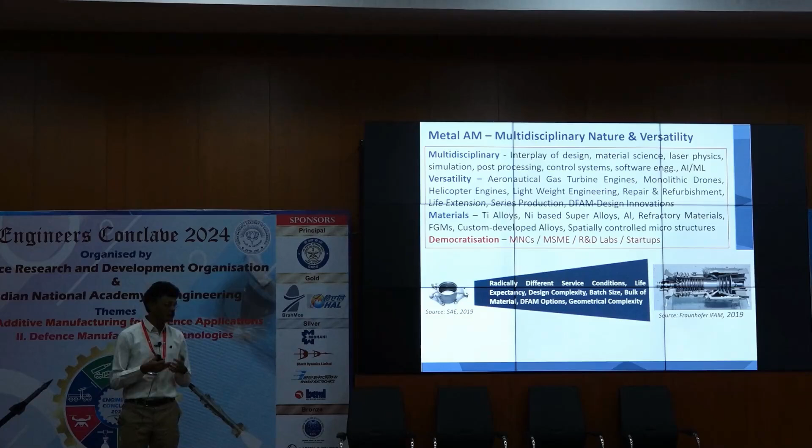Now the context which I would like to describe is connected with aerospace and defense primarily. And if you were to look at the application journey of NASA, just as a reference, the recent applications talk about bimetals. And as has been brought out by the preceding speakers, large format printing is also one of the most important things with which this evolution can easily be characterized.

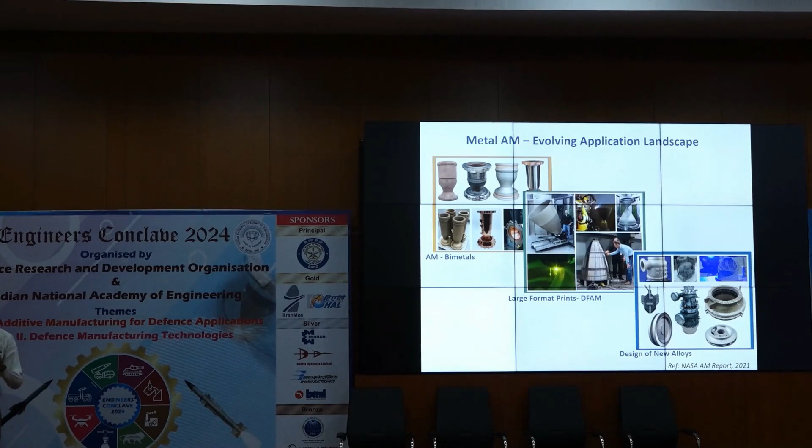And the reason why there is an explosive interest in the applications connected with additive manufacturing is because of the material choices. The kind of applications and their criticality can be easily inferred by looking at one of the early frameworks.

If you were to see here, initially the parts that used to be made were mostly confined to those contexts where parts were in the secondary load path. There is no criticality of the machine, the structural margin is absolutely very large, and you will not have any problem in case the part fails prematurely.

But if you look at the recent examples, we are talking about using mission mode parts with low margins, especially for critical applications with the A1 kind of class with reference to 3D printing related applications. And concomitant to that phenomenon is also the effort which is required with reference to qualification.

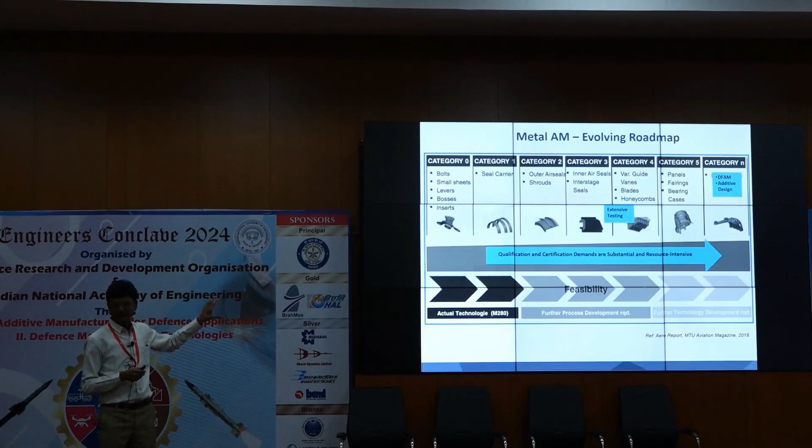Mr. Prasad is more qualified than anyone to talk about it, but if I have to capture it in just about a minute: the companies or enterprises which are into the development of the systems start up with category 0 components, which are not very critical with reference to the load path, and slowly and steadily they gain confidence in the behavior.

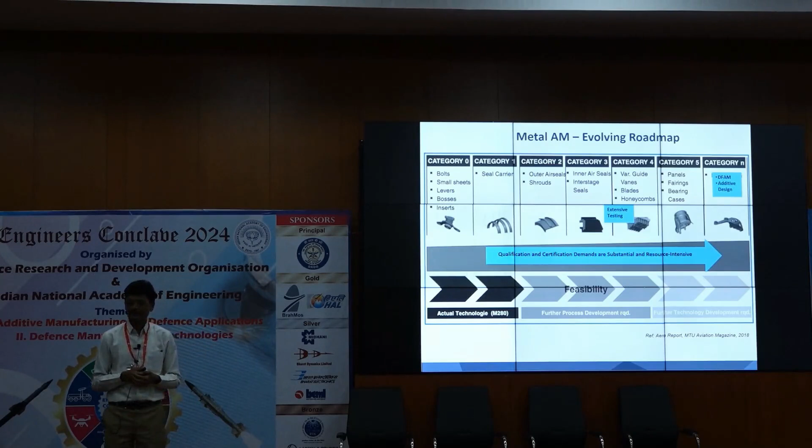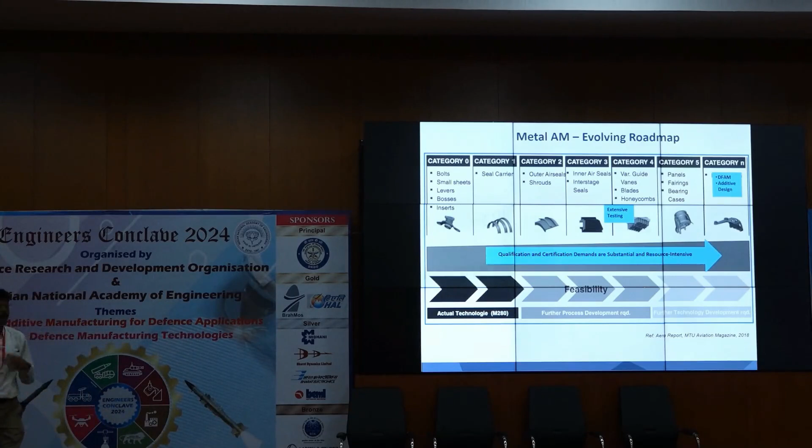In the designs, and we start looking at higher categories where we are talking about parts like variable guide vanes and turbine blades, etc. Equally, the interesting thing is category N, where you have an opportunity to revisit and repurpose the design and try to fulfill the functionality in a much superior manner.

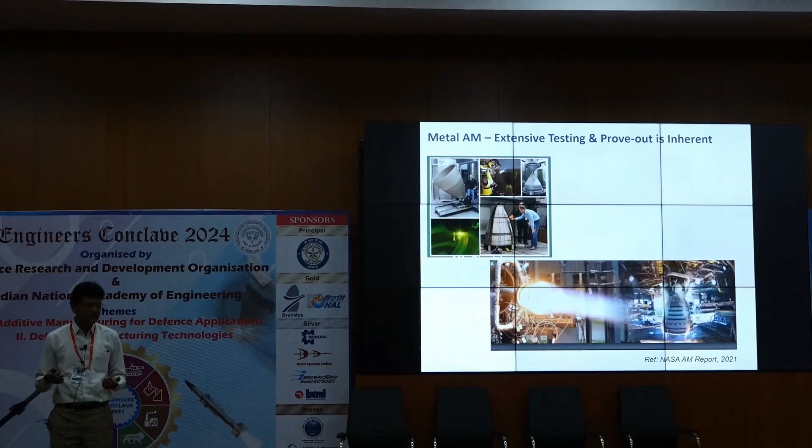Whenever we are talking about designing for additive manufacturing or repurposing the design, you can definitely see that the effort involved in manufacturing or realizing the physical artifact could be X, but the effort involved in proving out and certification could be 10x. So the effort for testing and proving out is one of the very important things when we are looking at the possibility of applications.

I'll just pick up an example. It's not a dynamic component. In fact, this is one of the very famous case studies from Bell Boeing Osprey. It is a military aircraft with VTOL and STOL capabilities.

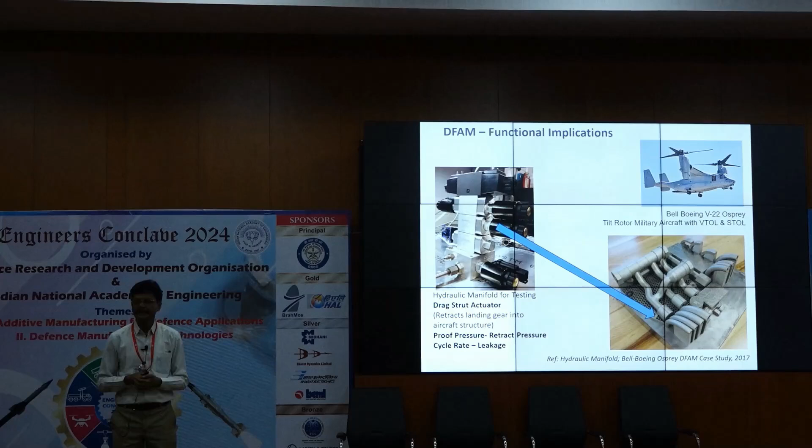And incidentally, the part which is shown is a hydraulic manifold, meant for retracting the landing gear into the aircraft structure. And the part shown there is required for checking the structural integrity evaluation of this drag strut actuator, and we are talking about proof pressure, retract pressure, cycle rate, leakage, etc. You can see the paradigm shift in the way the design looks.

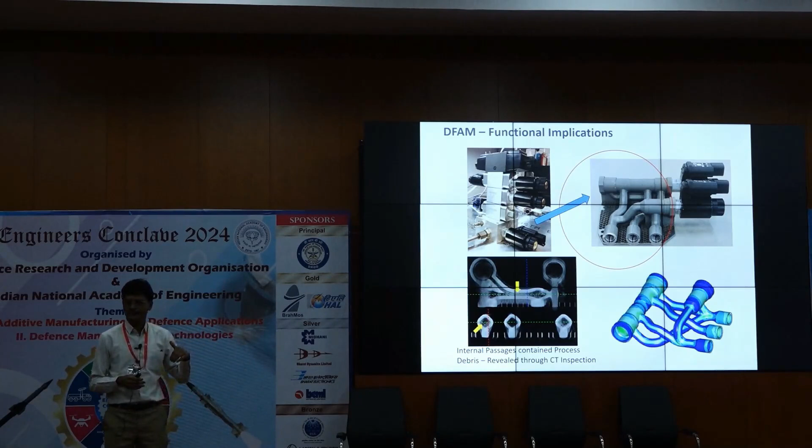The challenges connected with the DFAM could come and spring a surprise at any stage. Dr. John also talked about the standards, but what is very remarkable is the diversity of standards. We have a category of standards connected with general vocabulary, process-specific standards, material-specific standards, and also application-specific standards.

I don't know how many of you are aware, for offshore applications and naval applications, the DRDL has been working very closely with multiple naval agencies in India to come out with the certification portfolio for impellers. And there are a plethora of choices.

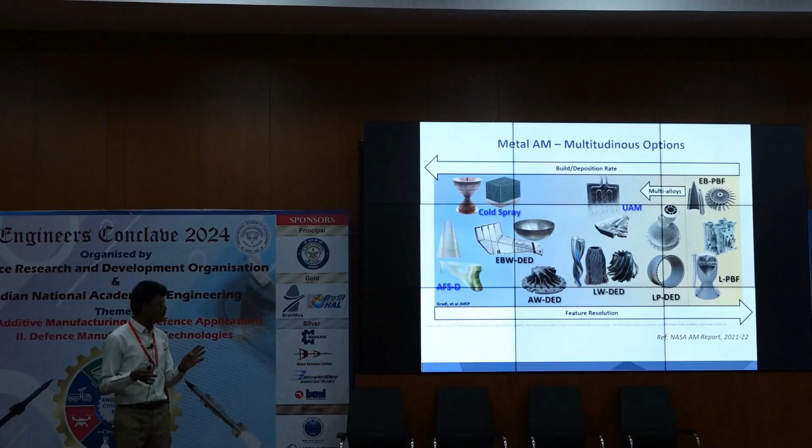If you are talking about metal AM, I would like to pick up just two features on the X and Y axis that decide our judgment. One is the resolution and the other is the build rate. If you were to talk about high volume or high deposition rates, definitely you will have proclivity towards the DED techniques where you can make large parts in limited time.

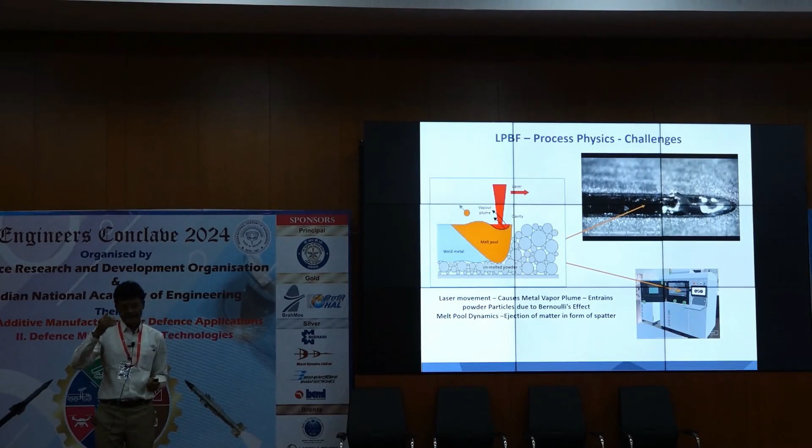But if you are talking about high resolution parts, we need to think about technologies like laser powder bed fusion. Central to this particular process is the interaction between the energy source and the metal powder, and continuously there is melting and solidification happening under the influence of high thermal gradients.

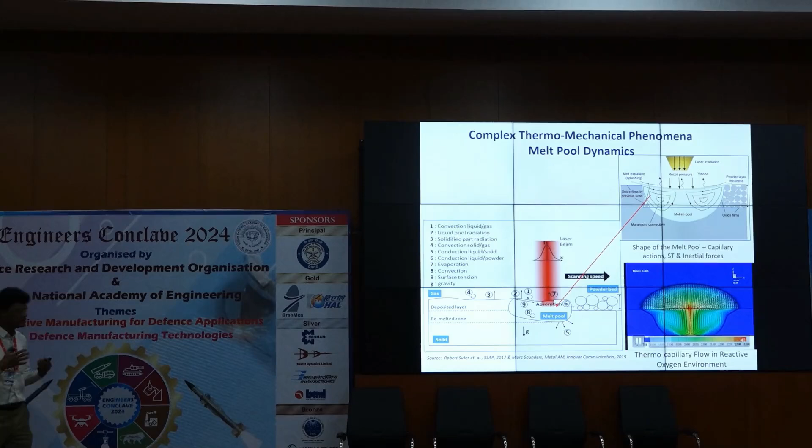Though the energy across the width of the beam varies marginally, that leads to differences in the surface tension, and these surface tension related differences cause turbulence in the melt pool. The melt pool size is not only influenced by the capillary forces, it is influenced by the surface tension gradients and also inertia forces.

Interestingly, gravity doesn't impact it. That's the reason why you might have seen many case studies where people are talking about additive manufacturing in microgravity. So contrary to what we think, gravity doesn't impact it.

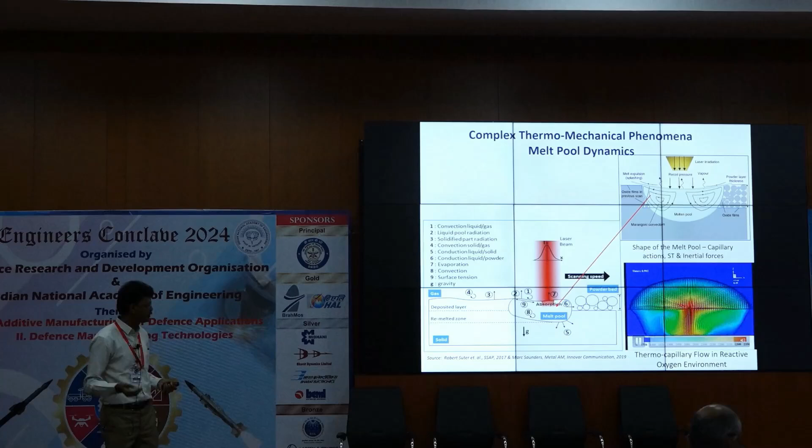If you were to look at the heat transfer modes at the center, we can see there is conduction and reflection, there is radiative heat transfer from the melt pool to the environment, and we are also talking about continuous churning and turbulence within the melt pool, which is leading to convective heat transfer.

So how do you actually approach this particular process while you do not know anything about the behavior of a material in the context of additive manufacturing? We start plotting these P-V diagrams, laser power on one axis and scan speed on the other. By various permutations and combinations, you can demarcate 3 different zones wherein if you apply less energy, you may lead to lack of fusion.

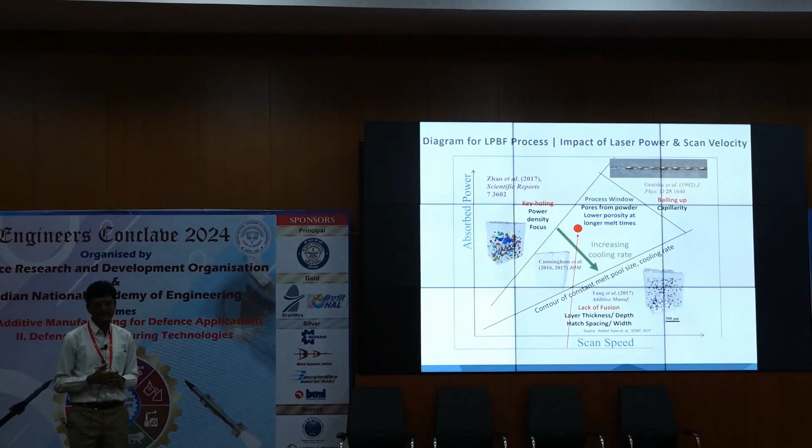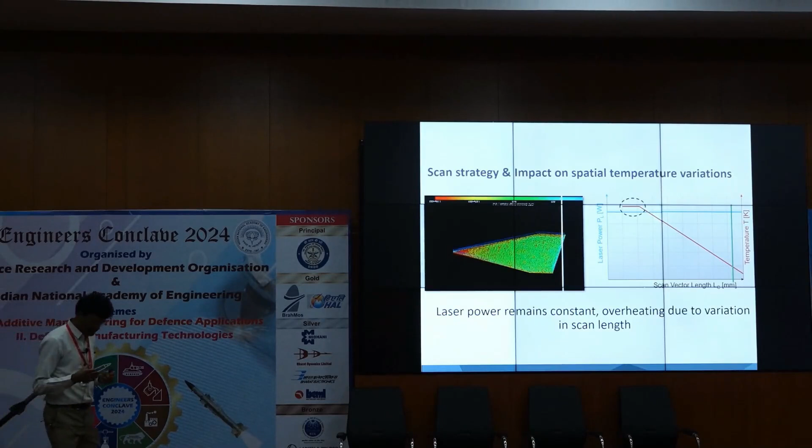If you apply too much energy than what is required, you may get into the keyhole regime. In between, a small space is called the optimal process space wherein you can confidently work. But incidentally, the system or the process is much more complex than that.

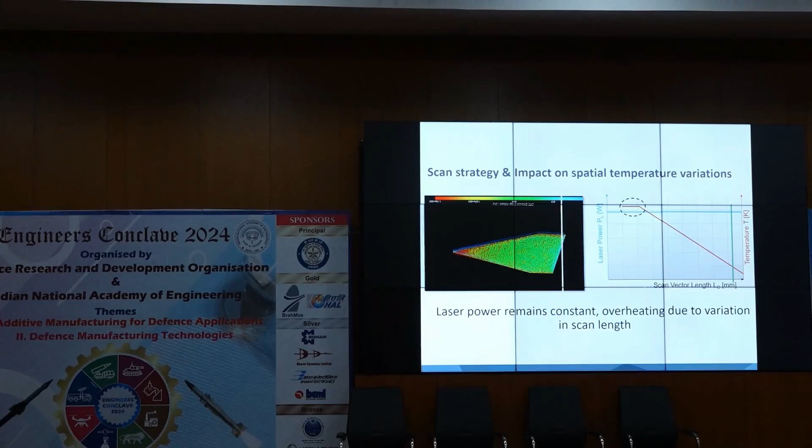Imagine you maintain the laser power constant and you are scanning across. Despite the fact that you maintain the laser power constant, just because there is a radical change in the cross section, suddenly there is a peaking of temperature which may lead to spatter in much excessive manner, leading to residual porosity.

So what do you do in this case, and what are the basic possibilities in terms of doing the experimentation and getting information into the behavior? We start looking at different parameters like layer thickness, hatch spacing, peak temperature. Then we are also looking at the specific heat of fusion, etc., and trying to develop these process maps which take into cognizance all the possible variations in the materials and their processability.

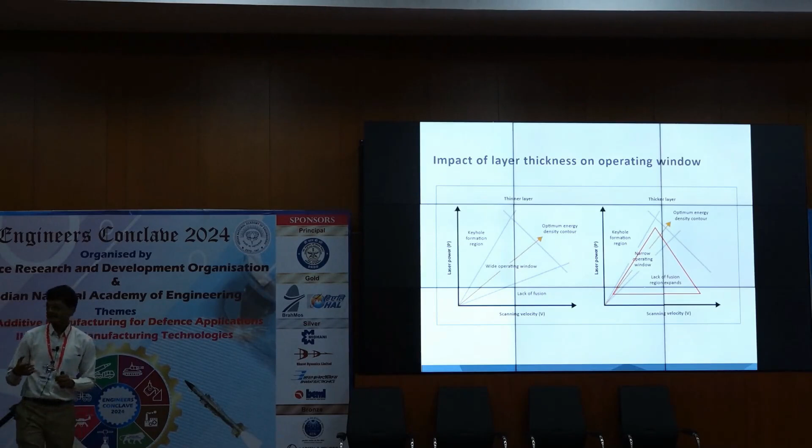Now comes a fantastic scenario. As somebody said, it was mostly connected with prototyping initial stages. But if you are able to do the prototyping with a lot of similarity to the eventual part, which in this case happens to be a quasi-hollow turbine blade, the regular process for investment casting of this could be anywhere between 12 to 18 months from the date of design finalization.

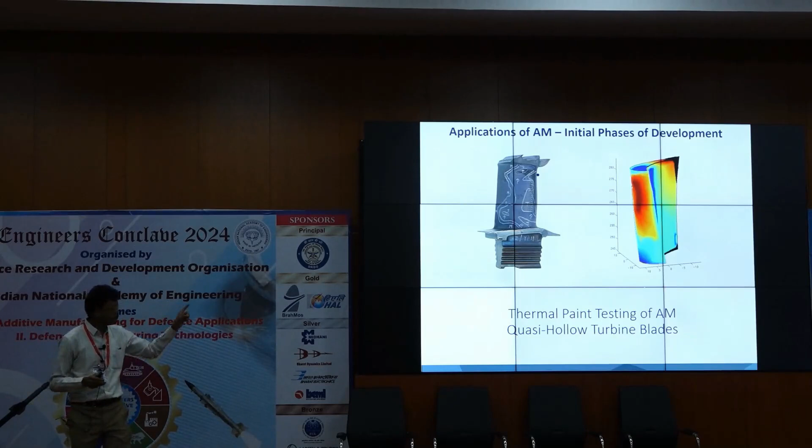But if you were to use metal additive manufacturing and make this turbine blade and spray it with temperature sensitive paints and check up in the heat transfer test rigs, you can get these isothermal plots on the surface which indicate basically the heat transfer distribution on these quasi-hollow surfaces. So this kind of information, which is absolutely valuable, which is only possible after making of the components,

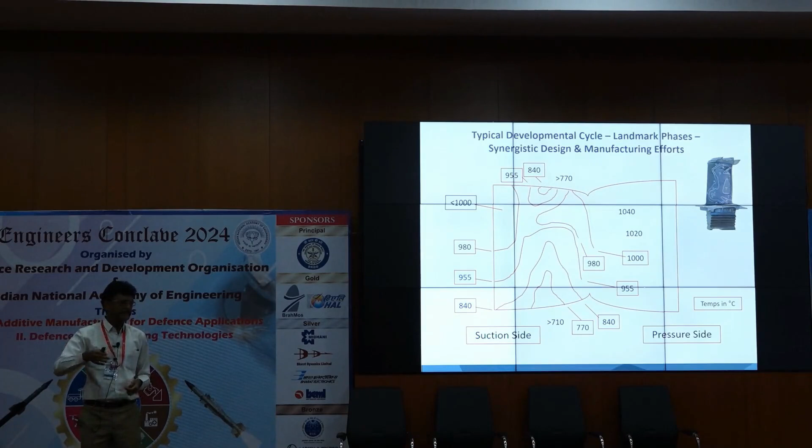can be obtained right in the early stages as long as the conductivity of this material is very close to the conductivity of the material out of which the eventual part is going to be made.

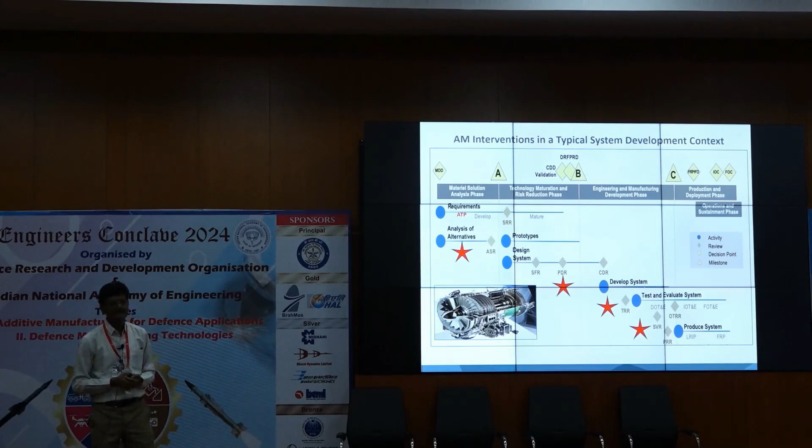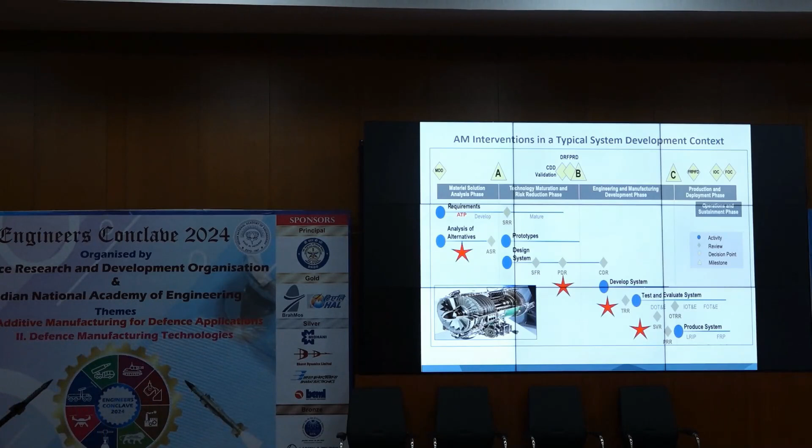This is the reason why, if you look at a typical development cycle of a complex aeronautical system, you see AM applications in the initial stages, midway where you're talking about tooling and design iteration, and also in extending the service life by selectively depositing material to extend the lifespan of the part beyond the design life.

What's happening in recent years is very interesting. In this famous Ashby diagram, we are always interested in materials with higher strength at lower density. But at macro scale, there is a coupling of relative density with macroscopic properties. And if you look at foams, they are bend-dominated, but the E by rho ratios are not exceptional.

But if you micro-architect the parts using powder bed fusion, instead of bend-dominated, they become stretch-dominated. And what is the possibility?

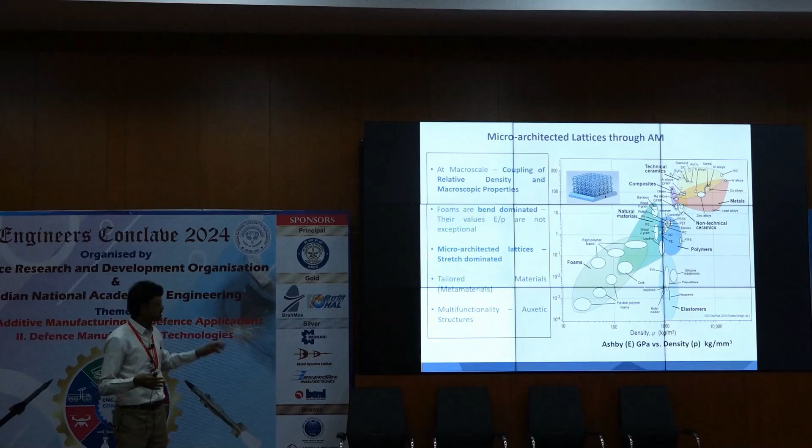Enormous. For example, if you make these kinds of lattice structures, the first is called conformal lattice, largely a surface lattice structure, not much complexity. You can use them readily in the noise suppression context. You go for gyroid, which has a fantastic feature of becoming support-free because it is self-supporting.

You can start using it for energy absorption, especially in the context of high strain energy. The last one, the third on the right extreme, is customized lattices, where you can mitigate the effect of stress concentration factors and hence the susceptibility to fatigue failures by going through lattice structures.

What's important is that initially, about 7 to 8 years ago, if you employed this kind of approach, you had to have one software just for component design, maybe SolidWorks. Then for lattice creation, you had to go to some other platform. Then you needed to do simulation just to understand how this quasi-hollow structure behaves with reference to surface conditions, and finally went into the build file preparation of the system.

Now, because of the versatility of the software, you can integrate all four modules into one, and complete the activities like this, which I did about 2-3 years ago. You can take the initial design and employ topological optimization, or apply the principles of generative design, arrive at a part, simulate it, understand the factor of safety, achieve a lot of weight reduction, and also compress the time frame.

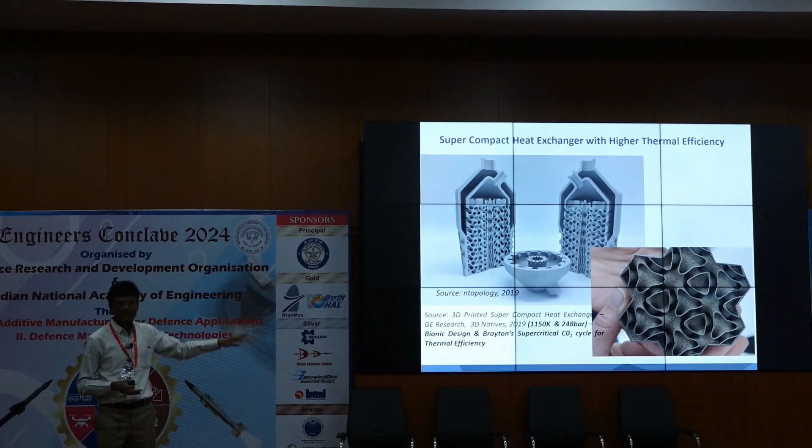...reminiscent of the human lung structure. They are bionic in nature. And so it's able to reach temperatures in excess of 1150 Kelvin and 248 bar because of this kind of quasi-hollow nature.

We have seen that in any context of manufacturing, whenever a new technology came in, let's talk about the history of casting or forging. The moment these technologies became prominent, the evolution of material choices also followed them.

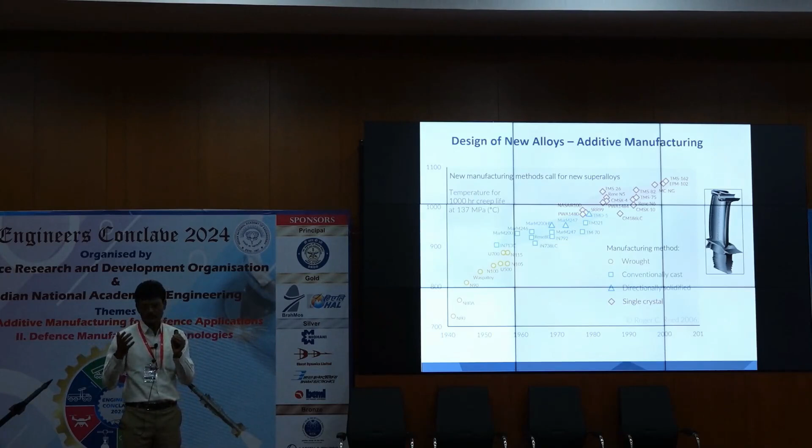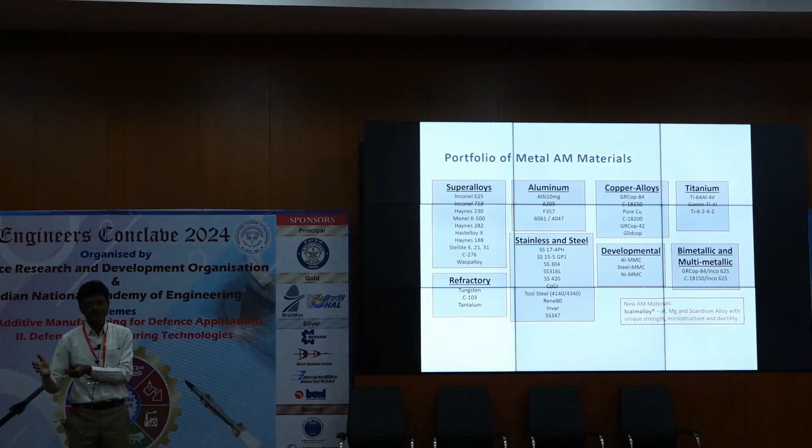But if you look at what happened in case of additive manufacturing, at least in the initial stages, most of the time we adapted existing materials depending upon the processability or welding compatibility to techniques like DED or powder bed fusion. So we are not able to really take the materials and applications to the highest levels or thresholds of possibilities because you are working on secondary choices.

But in recent times, you have seen lots of connected, involved work with material scientists, metallurgists, mechanical engineers, and computer scientists, where alloys are getting designed. I am very sure some of the experts might have spoken about it. I will talk about it in just about 30 seconds.

To start with, let's take the context of a ternary Ti64, or look at a material like Inco 718, which has close to 10 alloying elements. If you want to really explore the possibilities, the traditional empirical processes will throw options in excess of a million combinations.

So what's happening now is you give the input to software specifically developed for these instances, with reference to calorimetry, transition points, specific heat, etc. Then you can understand the thermodynamic phase data. And once you have the phase data, you can apply some application matrices and quickly understand how they work with reference to processability as well as strength.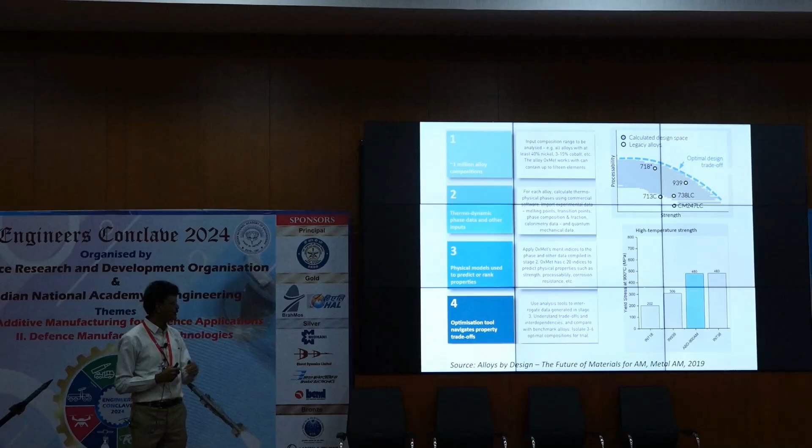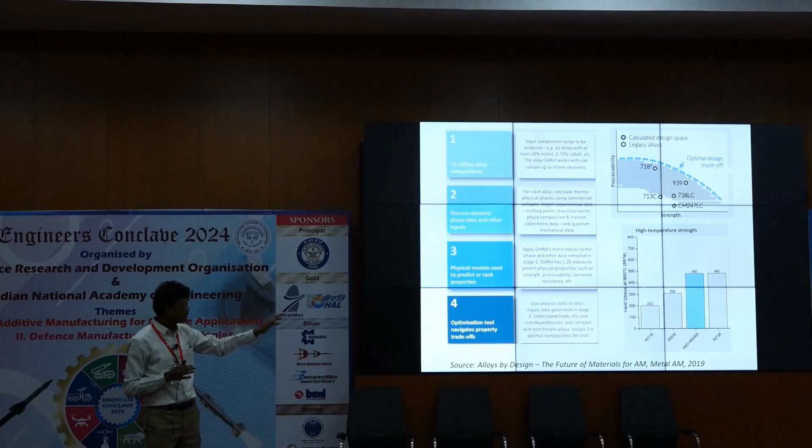Once you have this kind of information with two primary important parameters, you can create a design space wherein you are comparing a candidate material with the benchmark alloys, which could be 718 in this case or CM247. This will help you interrogate a limited number of material choices, and you can clearly see that the alloy which has evolved out of this interrogation is almost comparable to 718 in strength, but when it comes to creep resistance and oxidation resistance, it is vastly superior.

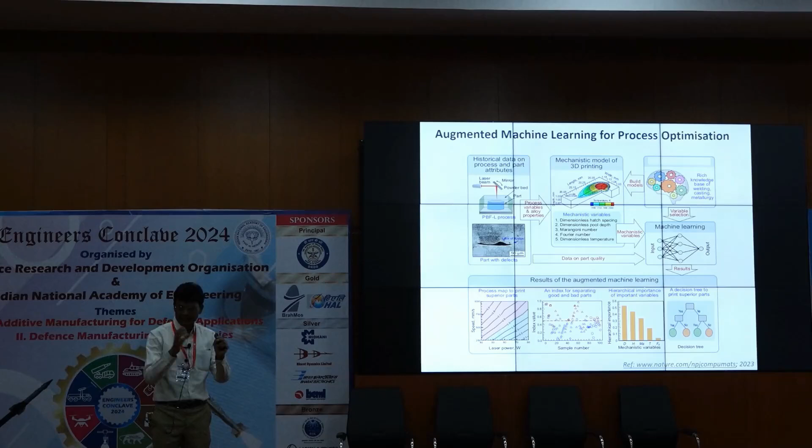This kind of complex mechanism used to be very difficult a few years ago. In recent years, especially the past 2-3 years, we have seen the synergistic combination of the machine learning approach into the development of alloys. What's happening is we understand there are a plethora of parameters which can affect the outcome, especially in the case of powder bed fusion.

If you are talking about material alone, you have particle size distribution, specific heat, density, absorptivity. If you are talking about the process, we talk about hatch spacing, layer thickness, scan speed. Even if you are very conservative and pick up the number of variables that can possibly impact the outcome, it could be in excess of 10 to 12.

So what happens in this case is you pick up dimensionless numbers, could be Marangoni number, Fourier number, or dimensionless hatch spacing. Traditional machine learning models require a lot of legacy data, reliable proven legacy data. Incidentally, we don't have that kind of luxury in the case of most materials in additive manufacturing.

So what do you do? You combine that with human intelligence gained from physics-based models and also the metallurgy. In the bargain, the machine learning models become sufficiently accurate in terms of predicting the hierarchical structures through which you can understand which parameter is impacting in which way, and you can also develop quantitative indices for understanding which are better choices and which are the worst choices.

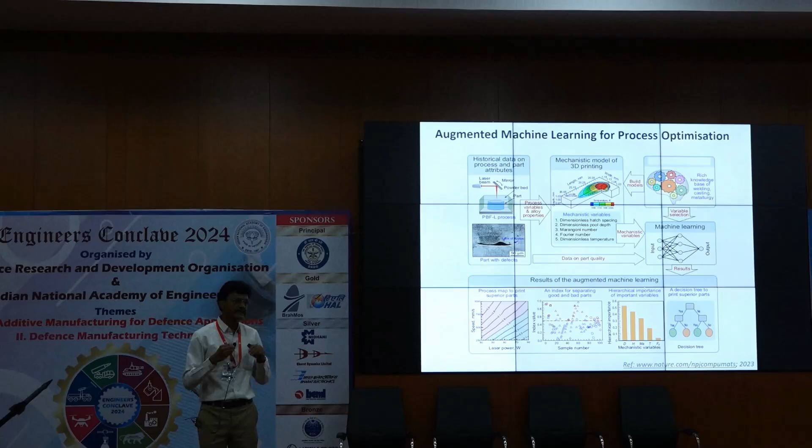So you can get information from this multifarious context, integrate them, and make your machine learning models or large language models so intelligent that if you start interacting in the form of a chatbot, it will start generating information relevant to making the part with superior density or less susceptibility to failure.

So to face this kind of scenario, the laboratories connected with AM are developing systems with open architecture with a lot of embedded sensors, visual sensors, vibrational sensors, dimensional sensors, chemical sensors, because in this case we are interested in capturing the information as early as possible in real time.

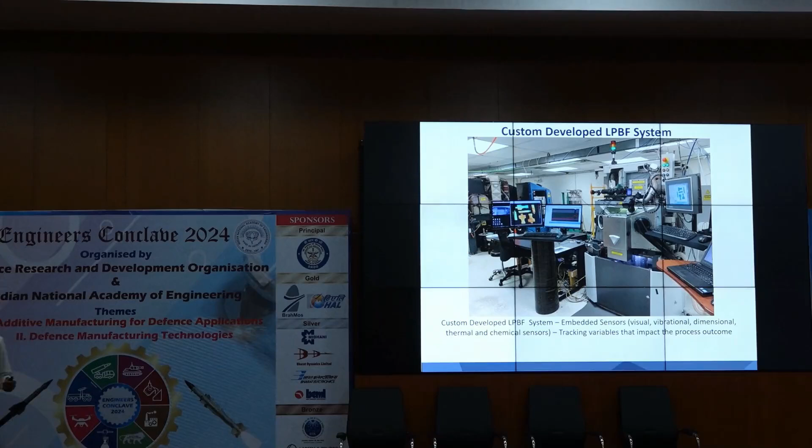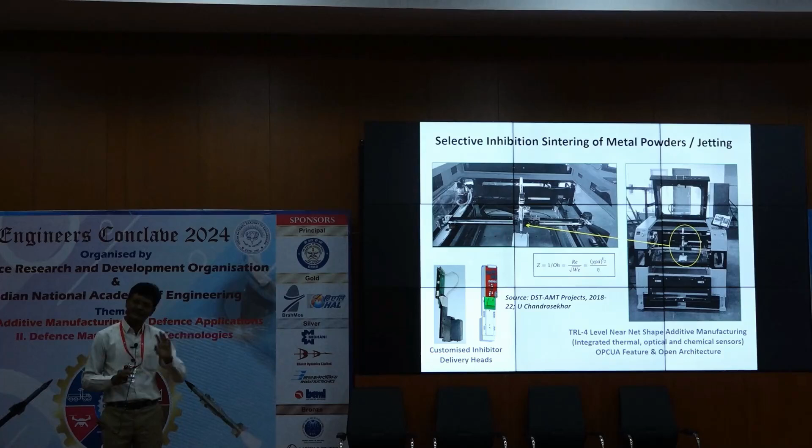In fact, I did one experiment 2 years ago with funding from DST in developing one system based on the principles of binder jetting as well as selective inhibition sintering. All that we were able to do is integrate some thermal, optical, and gas-based sensors, and we were able to immediately understand what combination of process parameters can lead to development of parts with superior density.

We really need to understand that whenever we are talking about powder bed fusion for strategic context, there is a macroscopic phenomena which manifests in the form of residual stresses as well as distortion at large scale. You have microstructural phenomena in terms of grains and grain boundaries, and you have meso phenomena which happen because of the small size of particles which are getting connected with the energy source.

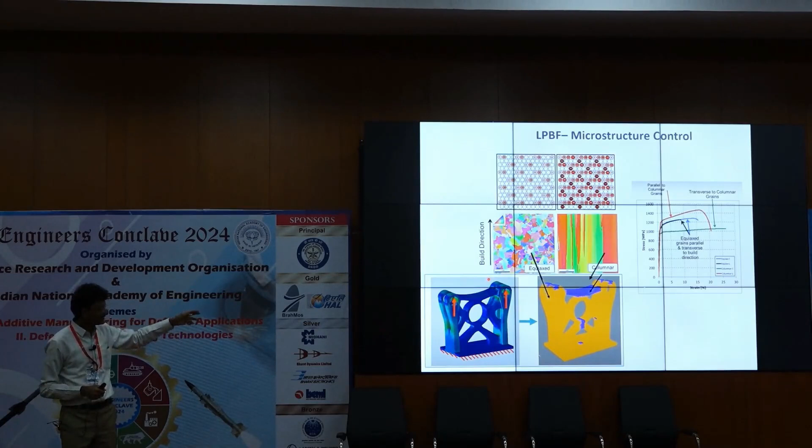So the current thrust of research is, wherever there is an instance of a part, let's say in some zones you want the part to have higher strength, in other zones you want to have a columnar structure with a proclivity to a particular direction.

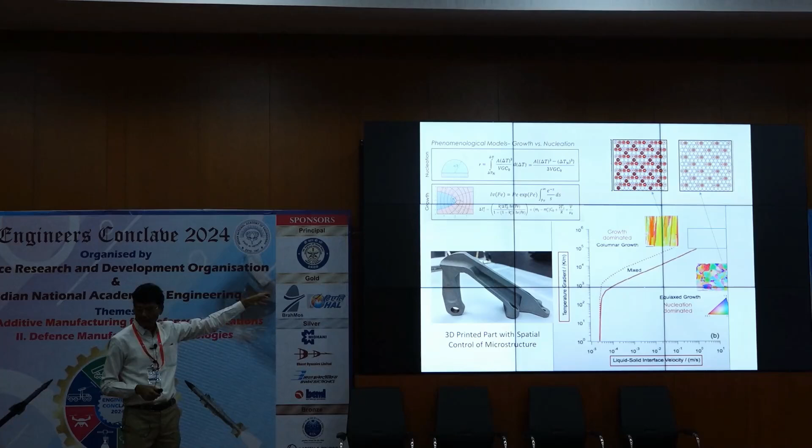In these cases, the entire approach can be based on phenomenological models connected with growth and nucleation. You can quickly infer that in zones where you have a liquid-solid interface velocity at a low level with a temperature gradient which is high, you get a columnar structure. The other extreme gives you an equiaxed growth structure.

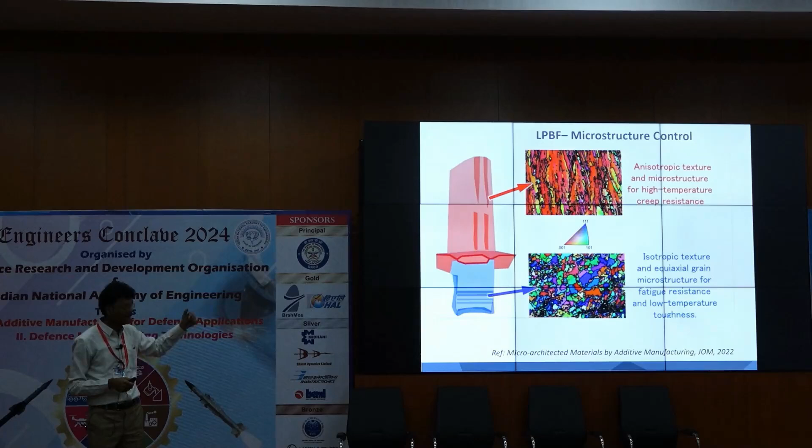So where does it lead to? Ultimately, this is only simulation at this point of time, it leads to creating turbine blades with anisotropic structure wherever you are interested in high temperature creep resistance, and in the fir-tree roots you are interested in the isotropic structure because you are interested in fatigue resistance.

So I want to conclude by saying there are a lot of challenges with reference to application of this technology for realizing a complex system, but democratization is very synonymous with additive manufacturing when talking about design realization. A point of gratification for all of us is the emergence of small units in different corners of the country able to make complex parts out of exotic material for strategic application. But one important thing is the long lead time or cycles for proving and testing it.

Thankfully, agencies like CEMILAC have gone ahead and launched strategies or missions for inviting private players into our ecosystem and getting this entire certification process accelerated as much as possible.

Though there are a plethora of opportunities for seeking funding in additive manufacturing processes and technologies, many agencies are developing indigenous systems. Some of you might have observed, four days ago, RRCAT along with a private company launched a DED technology system with a chamber size of almost 750mm by 1.5 meter. VSSC was quickly able to recognize the impact of that innovation and got into a long-term contract for supply of 20+ engines.

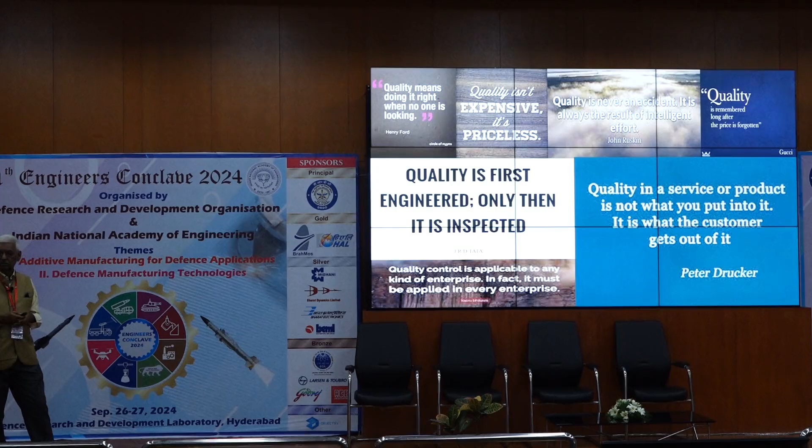So effectively everywhere what comes into mind is how do we assure quality. The definitions here are variable, but we want to build quality into the product rather than trying to achieve that after the product has been built, which is very true for additive manufacturing as also for many other materials.

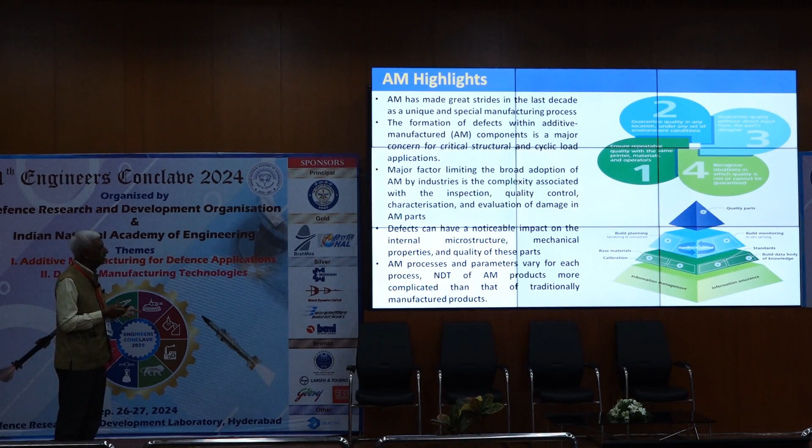So if you look at the highlights, again, a lot of that has been touched upon by many people. But if you look at it, the repeatable quality with the same printer, materials and operators, again touched upon by many people, including my previous speaker, guaranteeing the quality in any location under any set of environmental conditions, and so on and so forth.

So basically, to ensure this quality, we have to have methodologies which support the whole additive manufacturing process, either through in situ monitoring or through post-build NDT, or NDE as we call it, to effectively make sure that the quality of the product which we eventually want is achieved.

But the major factor today is the complexity associated with the inspection, quality control, characterization, and evaluation of damage in AM parts, which will start coming soon as we have more and more AM parts in service, just like we have challenges of damage in conventionally manufactured materials. This will be a big challenge.

And so the complete understanding of the AM product, the process, the microstructure, the stresses, everything becomes very important. So defects, again, not something new, can have a noticeable impact on the microstructure, mechanical properties and quality of these parts. So once again, ensuring you have a product with minimum defects which can be inspected and then repaired or taken care of is very important.

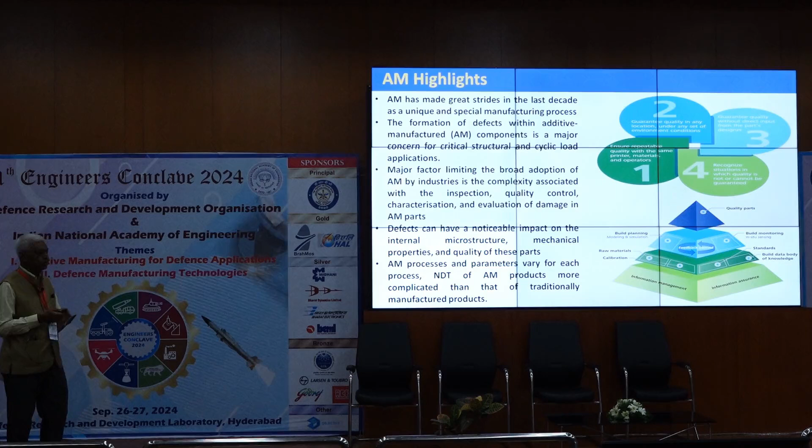So the AM process and parameters vary for each process, and NDT of AM products are more complicated than of traditionally manufactured products, as you will see in a couple of minutes.

So the approach is, of course, process qualification, which is what was talked about by the previous speaker. Ensure that the general process is controlled, repeatable, and can produce components within quality requirements, and of course machine, powder, operator, and the process itself.

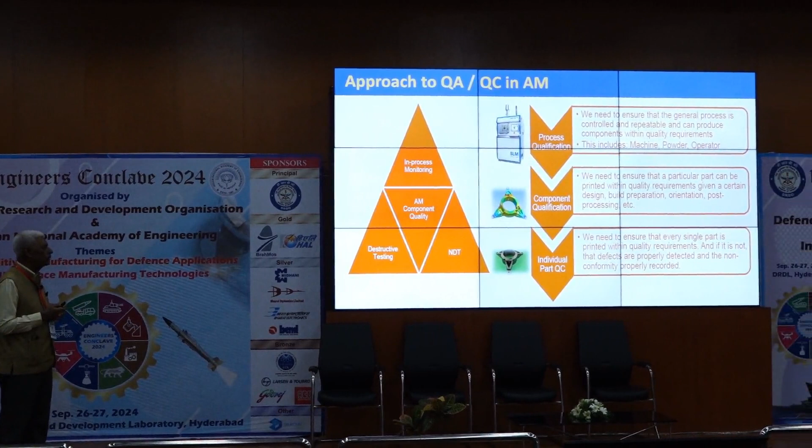And then, of course, which was touched upon, was component qualification, that any part can be printed within the quality requirements, given a certain design, build preparation, etc. And then of course individual part QC, which has to be done to ensure that every single part is printed within the quality requirements, and if it is not, defects are properly detected.

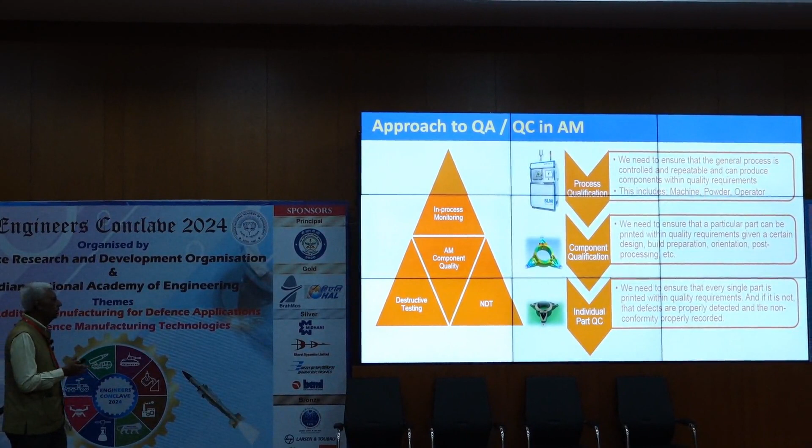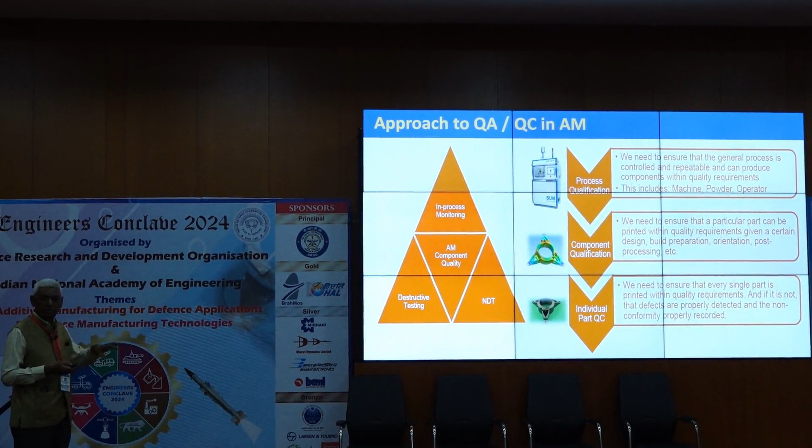So again, going back to the emphasis of having a good combination of destructive testing, which will obviously get you the properties, a lot of NDT, NDE, in-process monitoring, which will all combine together to eventually give you the kind of product quality which you're looking for.

And so this is again kind of the same thing elaborated a little more. The defect sources can have severe impact on the materials and on the part itself. And there's a long list of things which has again been talked about by previous speakers yesterday and today.

But this itself tells you that we are trying to deal with a lot of different issues. And unless we have the right technology which can address all of these, we will still be in a state of finding out solutions, or having less reliability or confidence in the methodology.

Especially we are standing here talking about defense, space, and aerospace. We just can't afford any of those failures. So it's very important that each of these are addressed.

And just like in conventional manufacturing methods, for an NDE engineer, the holy grail is the day when NDE, in a completely non-destructive manner, can do three things: detect all defects, detect and characterize microstructure, and detect and characterize stresses. So the three major nodes of the triangle: defects, microstructure, and stresses.

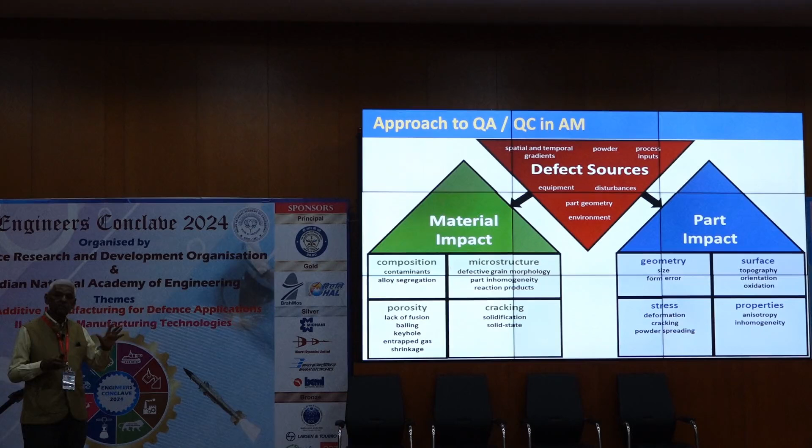That is what we are struggling with even in conventional manufacturing methods. And we probably have made great strides. I think we can claim today to be very good as far as defects are concerned in conventional manufacturing, but here and there we are still working a lot on microstructure and stresses.

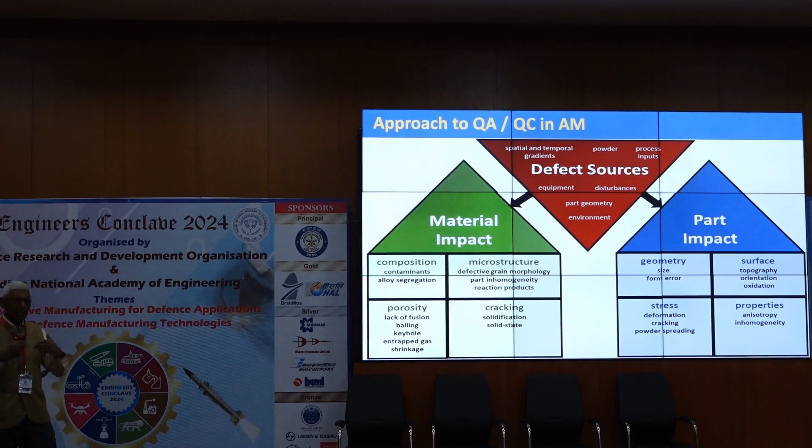But here, when we come to AM, we are talking about the struggle being right at the first one, which is defects itself. And microstructure and stresses obviously are much more difficult than defects when we're talking about detection and characterization. So how can we do defect control?

Obviously the best is the first one, the green one: avoidance. How can you really improve the process with whatever methodologies? We are not getting into the details, but if you can do more and more defect avoidance — and that is true for both conventional and additive — you can really do better off in terms of use.

So we always look at things like mitigation. How can we have corrective action triggered partway through defect formation? This is where in situ monitoring and online monitoring come in, where we at least stop the process or get feedback that something is going wrong. So this is again mostly partly reactive and partly proactive.

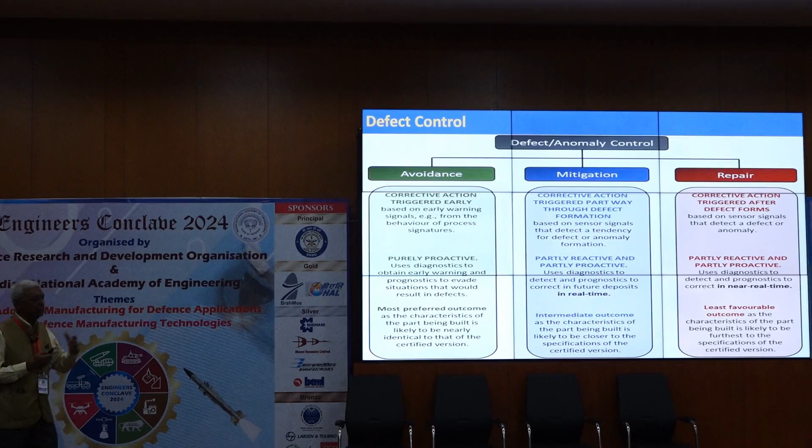And last but not least is the repair, when you have to take corrective action post-build, when the defect has formed and you really do not have many options.

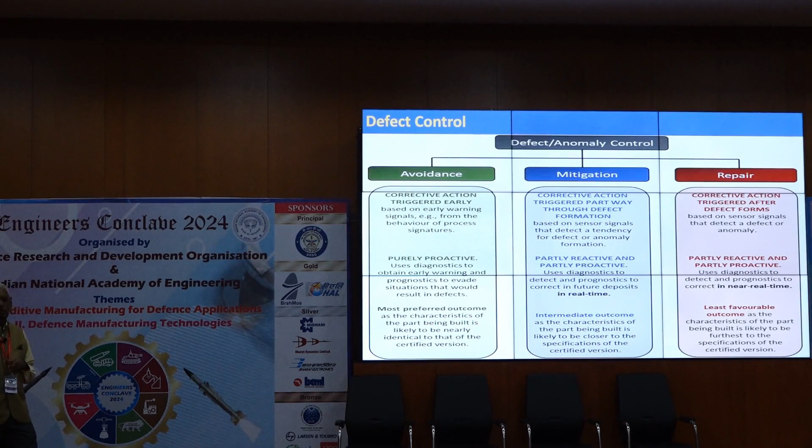So really speaking, we are looking at a two-dimensional approach to getting better and better quality in AM. That is about how do we have better in situ monitoring methods, and how do we have better NDE methods, which are inspection methods post the build.

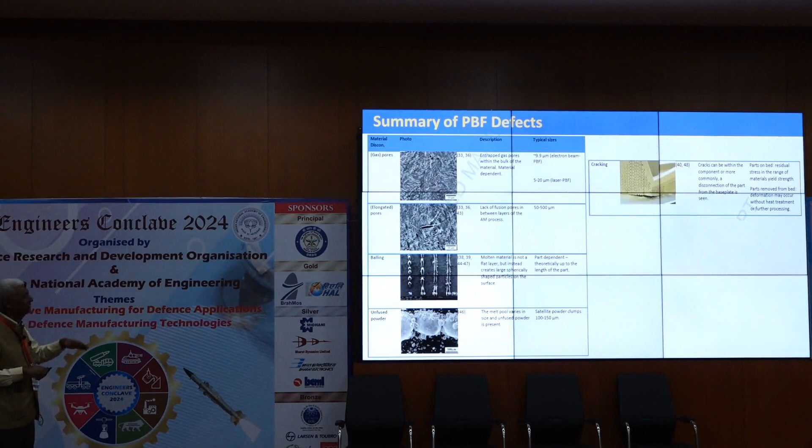So one way of control which we saw previously is avoidance, right? The buzzword is how can we avoid defects, which could be through proper control of process parameters, which again has been touched upon by many speakers. But irrespective of how well we do, just like in conventional manufacturing, we will land up with defects. We still do not have any methodology to completely avoid it, which means we have to continue building and developing newer technologies, or utilize existing technologies to do better inspections.

The biggest challenge which came along with it, especially for the inspection world, is the fact that when you used to make parts separately and assemble them, we had the luxury and liberty of inspecting individual parts before they went into assembly. But now, with the excellent benefit of AM, of building complex parts, there is a huge challenge of inspection of such complex parts directly.

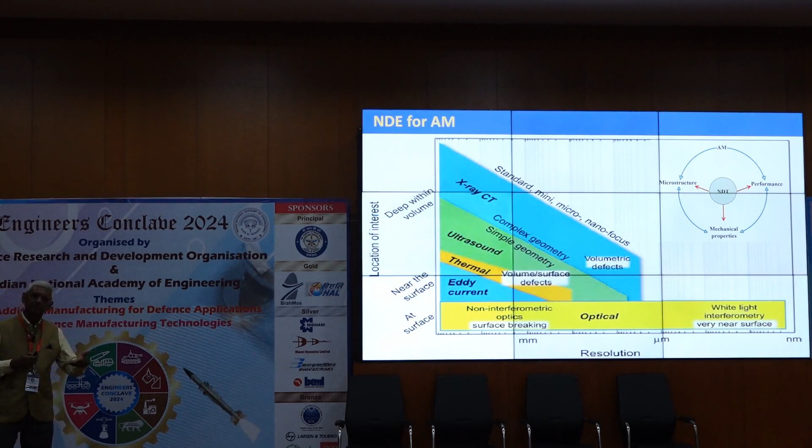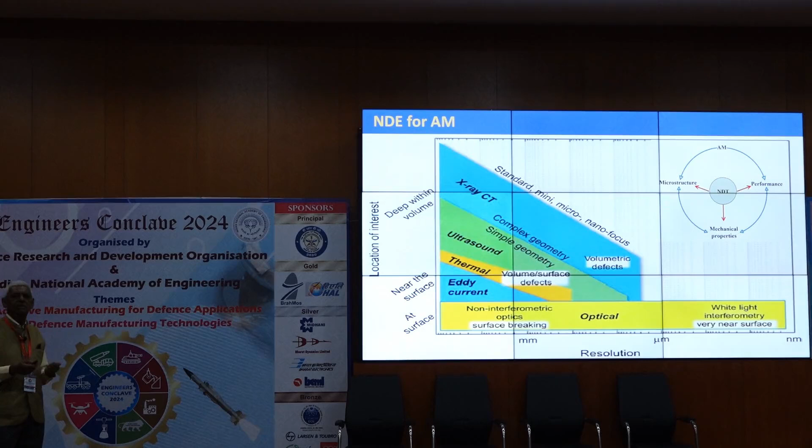On the other hand, we have primarily three types of defects: surface, subsurface, and volumetric. The physics of the methodologies allows some methods to only detect surface defects, some to do surface and subsurface, and some which can do volumetric. So depending on the process you are using, depending on the type of defects you are expecting, you will choose the appropriate method, combined with the resolution you are looking for.

So you do have a bunch of methods already available, which have been well tested out in conventional manufacturing, but they can't be blindly applied here because of several complications, especially things like surface roughness and the microstructure which evolves. This makes it a little more challenging to even apply conventional methods to these parts.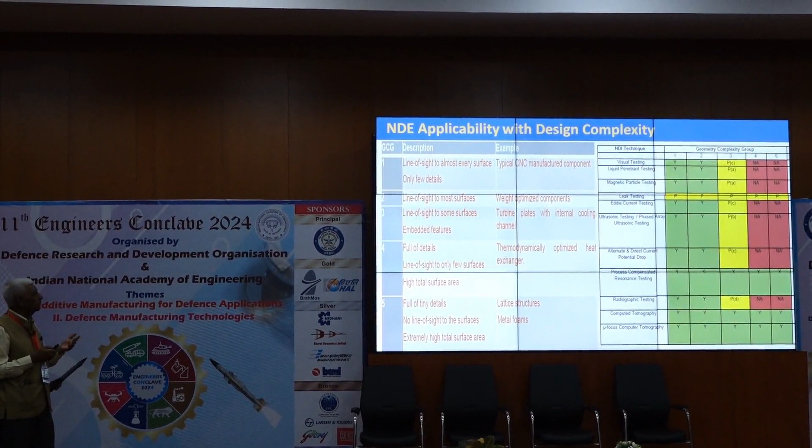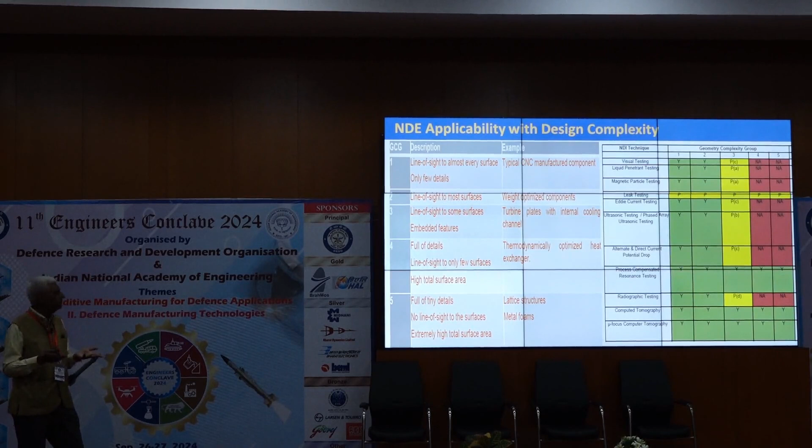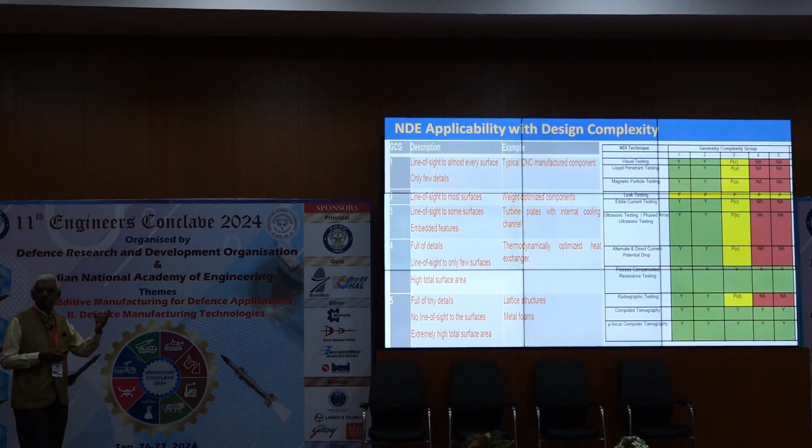The other thing is about design complexity. The biggest advantage of AM has been the fact that we can build complex design parts. The US Air Force came up with a classification of 1 to 5 design complexities. Level 1 is where there's line of sight to almost every surface and only a few details are needed. Level 2 is line of sight to most surfaces, with more details. This will determine what NDT method can be applied, so classifying your component from 1 to 5 is directly correlated with what methodology can be used, giving guidance on how to move forward.

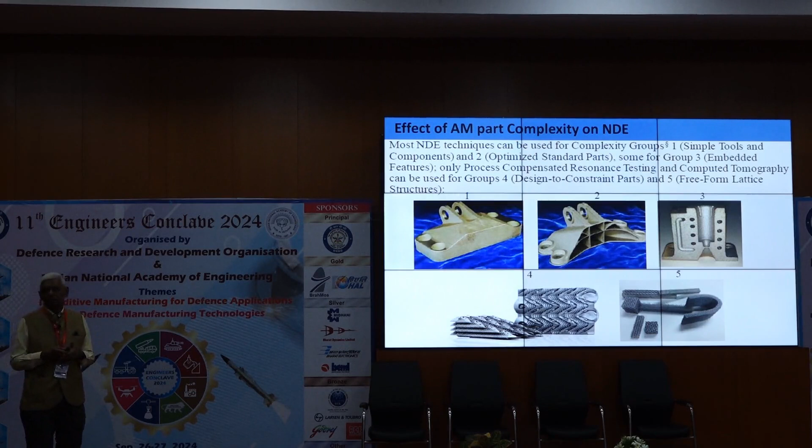This is just an example. Group 1 is simple tools and components, optimized standard parts, where you have access to all the surfaces, so most NDT methods can be applicable. But as you go towards complexity 5, it becomes extremely tricky. That is where computed tomography becomes one of the most popular methods today for complete complex part inspection in 3D.

As mentioned by my previous speaker, the industry typically works on standards, and unfortunately the number of standards for non-destructive evaluation and inspection is still very limited. We do have ISO 52905 released last year, the new version, which talks about a couple of methods, not all of them, and it's more generic in nature. So we really have a strong need to work on standards, which I'll address in the recommendations.

I think it's a combination of all the industries, be it defense, aerospace, automotive, whoever it is, to form some kind of consortium, because we need to have a seat at the table wherever standards are being made, be it ASTM, ASME, ISO, BIS, and so on.

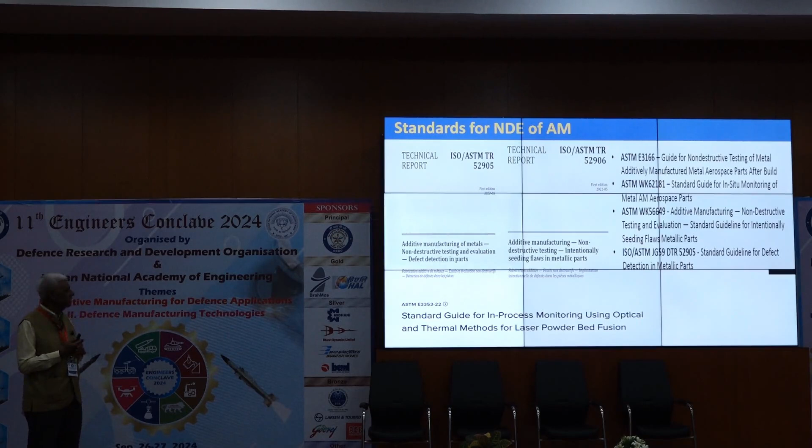One of the challenges with NDE, as those who have practiced it would know, is that we also have to create a lot of artificial blocks, and that for the AM process is not very easy. There is one standard that talks about intentionally seeding flaws in metallic parts, so you create artificial defects using this kind of standard, and then use that for inspection.

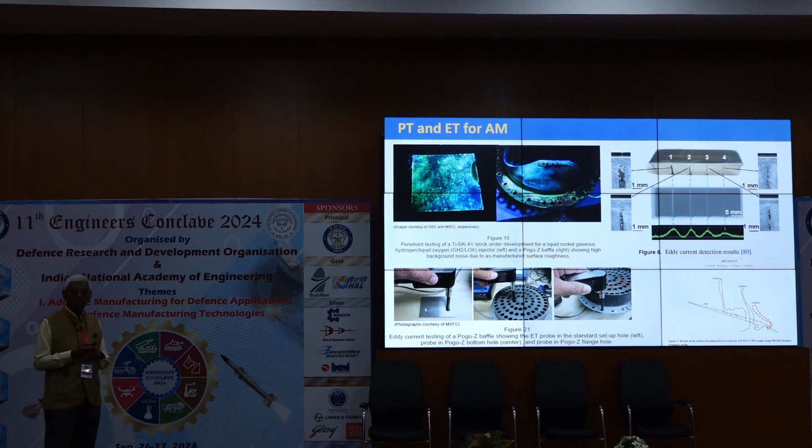Just a quick example, taken from literature, of how penetrant testing is being used for AM parts, which has its own big challenge because of surface roughness. Penetrant testing is applicable only for surface defects open to the surface, and doing it on a very rough surface is very, very difficult in some sense, so we need to work on that.

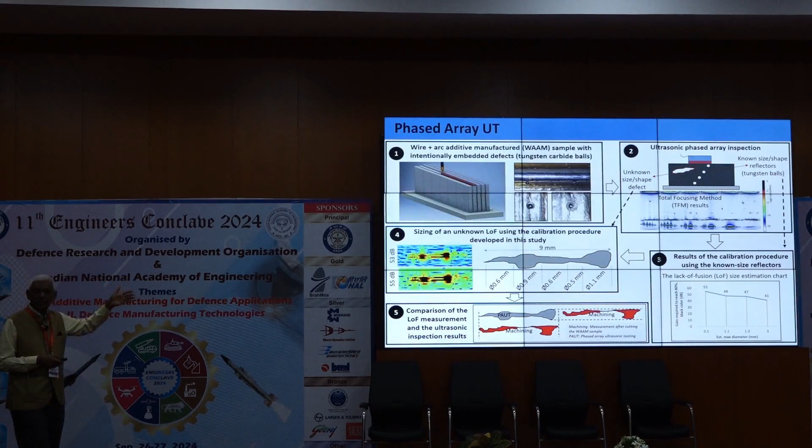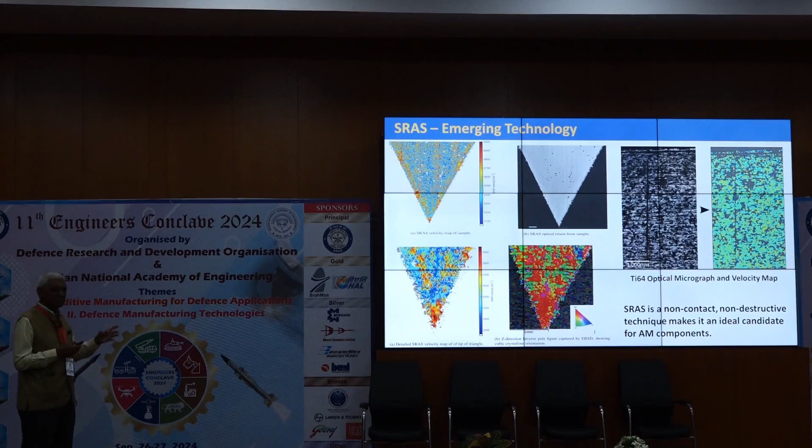I'm going to skip some of these, but they're available in the literature. Phased array ultrasound is one of the most popular techniques, been around for a few years, and is being used more and more in additive manufacturing. There's also a very upcoming and popular method called resonance ultrasound spectroscopy, which already has a standard, where the whole AM component can be inspected. Spatially resolved acoustic spectroscopy is another popular method, especially for microstructure and texture, invented by a university in the UK, and is gaining popularity.

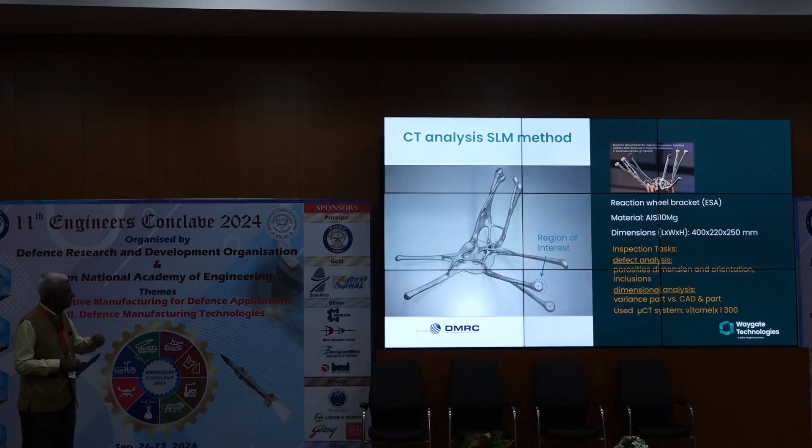I'll skip some of these in the interest of time. A lot of CT work, thanks to Waygate Technologies who provided these charts on porosity detection, and a lot of work on powder characterization, because just by using CT you can virtually characterize all the characteristics of a powder: output volume, surface area, sphericity, frequency distribution, and so on.

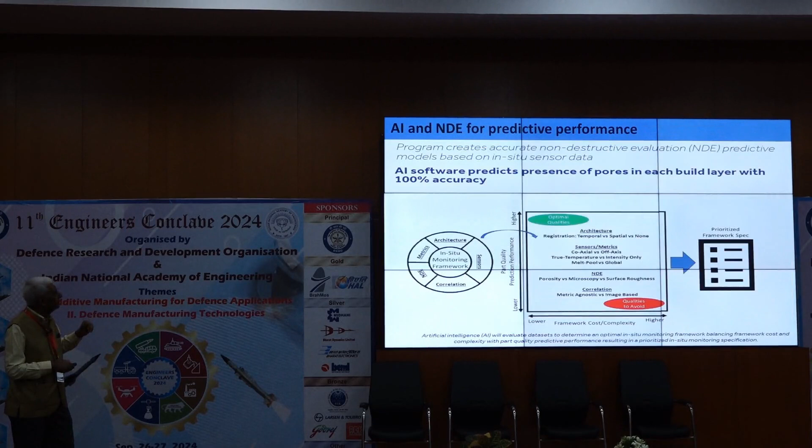I'll quickly jump to what I think is the main thing I wanted to talk about in the interest of time: automated hybrid NDE methods, with a lot of use of artificial intelligence to get better and better parts.

So this is probably going to spend a few minutes. So what are the real challenges and gaps which we have seen?

The biggest thing, as I already mentioned, lack of standardized procedures for AM. Material specific inspection guidelines, very limited in situ monitoring technologies, complex internal geometry inspection still very, very difficult, surface finish, quality control, limited computational models for defect detection, lack of standards for microstructure is very, very far.

Residual stress is still very far in terms of the standards and even methodologies to do that. And of course, when we come back, we find that we again going back to CT as a methodology for inspection. Inspection time and cost is a big thing. As you know, those of you done CT know that it's very time consuming and of course cost. So that is not really the solution in the long term.

So we do have to find different ways, either a combination of methods, hybrid of methods, where we do CT only on a specific area and not the entire volume and so on. And of course, limited feedback loops, which again I'll talk about in a few slides, and the whole complexity of the certification process.

And last but not least, which has been touched upon, training personnel. As you know, in conventional NDT, we have level 1, level 2, level 3 certifications for every method, UT, RT, and ET, and so on. Now they are very good at forged parts and casts and tubes and pipes and all the traditional stuff. But when it comes to AM, who knows? Maybe we need to think of a specific track where we characterize the certified inspectors level 1, 2, and 3 for AM specific parts.

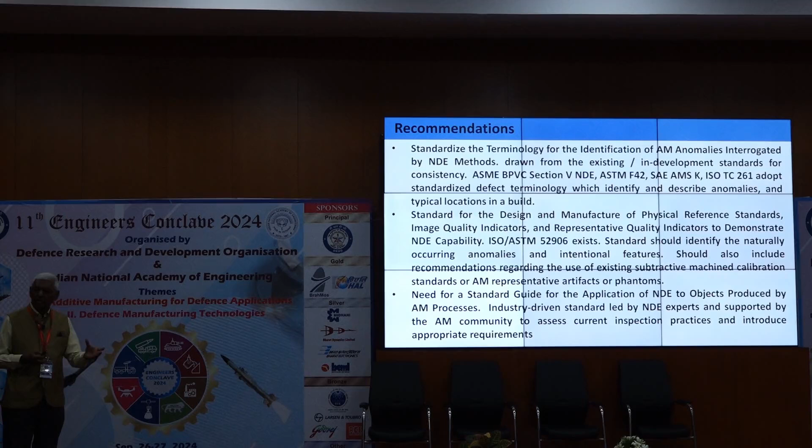Need for a standard guide for the application of NDE to objects produced by AM processes. We still do not have something. So industry-driven standard is a very much essential thing, if we really need to see NDE and in situ monitoring progressing along with the fundamentals of AM, which already is making good progress.

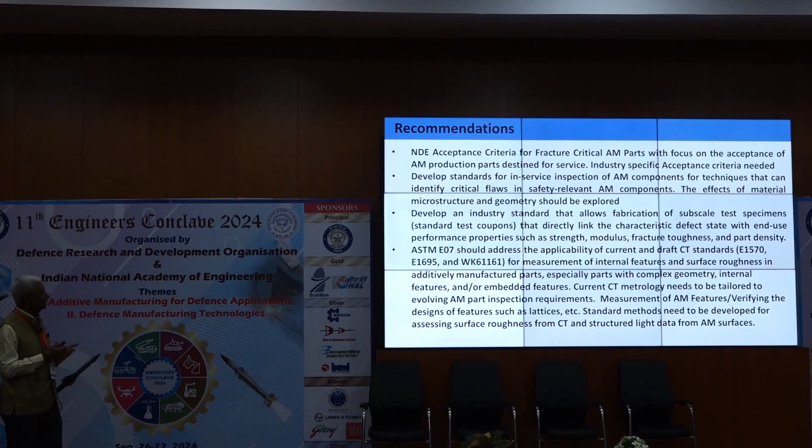NDE acceptance criteria, still we do not have anything, especially for fracture critical AM parts and so on. Develop an industry standard that allows fabrication of subscale test specimens which meet the characteristic defect state, microstructure and other properties. And of course, ASTM said that the E07 committee should address applicability of current and draft standards which are already in the works for measurement of internal features, which is dimension. So CT also gives you a lot of dimensional information.

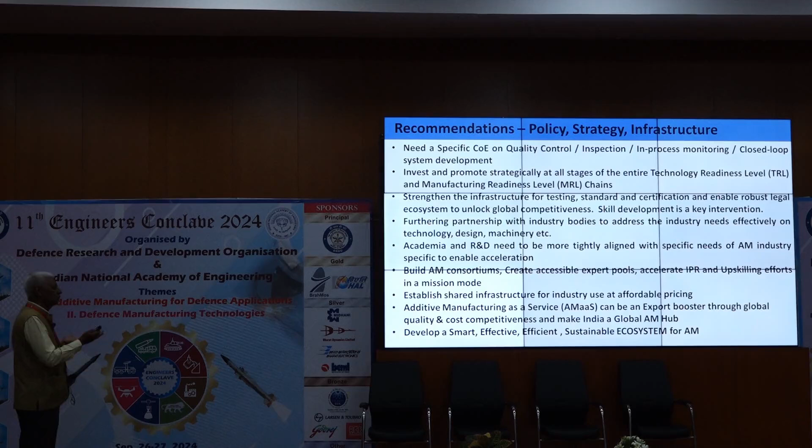Obviously, a common solution to most problems is how to bring academia, R&D, and industry more closer and see how we can solve many of these problems. Eventually, we would like to have a smart, effective, efficient, and sustainable ecosystem for AM, where the inspection goes hand in hand with all the advancements in manufacturing.

So I've got just 30 seconds. One of the other recommendations is about most of the things being open loop feedback system today, and I think a closed loop feedback system, as more developments in situ monitoring happens, is probably the way to go for the future.

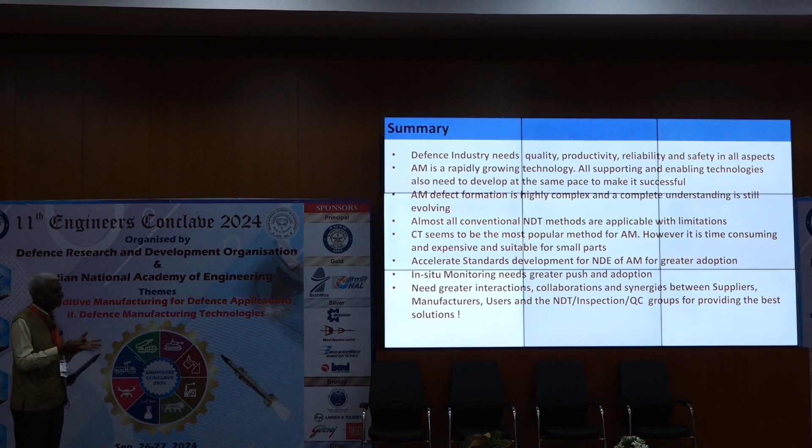CT seems to be the most popular method currently. However, it is time consuming and expensive and suitable for small parts, but as we go to the thicker parts, it becomes difficult to detect smaller and smaller defects. Accelerate standard development for greater adoption. In situ monitoring needs greater push and adoption and needs greater interaction, collaboration, synergies between supplier, manufacturer, users, and the NDT inspection QC groups for providing the best solution. Thank you very much.